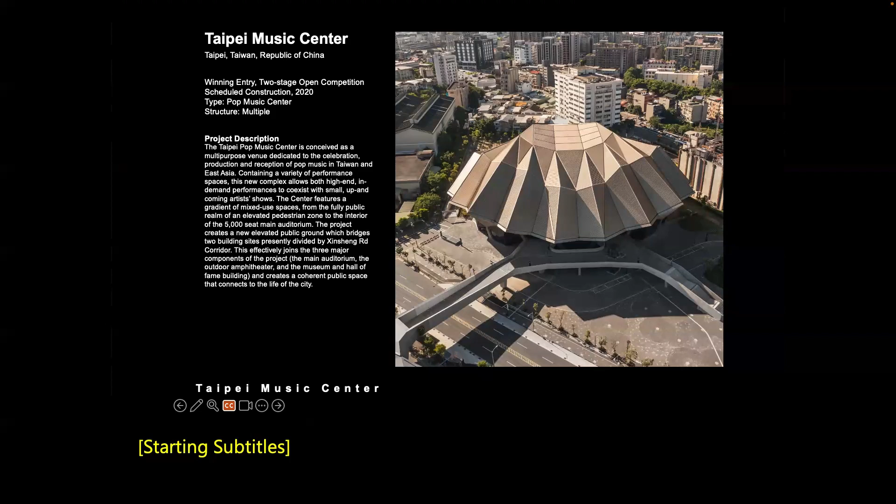So I'm going to be talking about 3 projects that we were involved in Taiwan. Two of them were built, one of them wasn't. The Taipei Music Center first, which was won in competition in 2009, 2010.

One of the things that characterized that series of competitions in Taiwan was that they always began not only with propositions for architecture, but also the kind of urban impact. There was always an urban design study that would accompany the specific architectural proposal.

In this case, it related to creating a new precinct in Taipei that would be dedicated both to the production and performance of music, popular music but also other forms, and that would bring together the distributed producers of music, especially in Taipei, into this new area called Nangang.

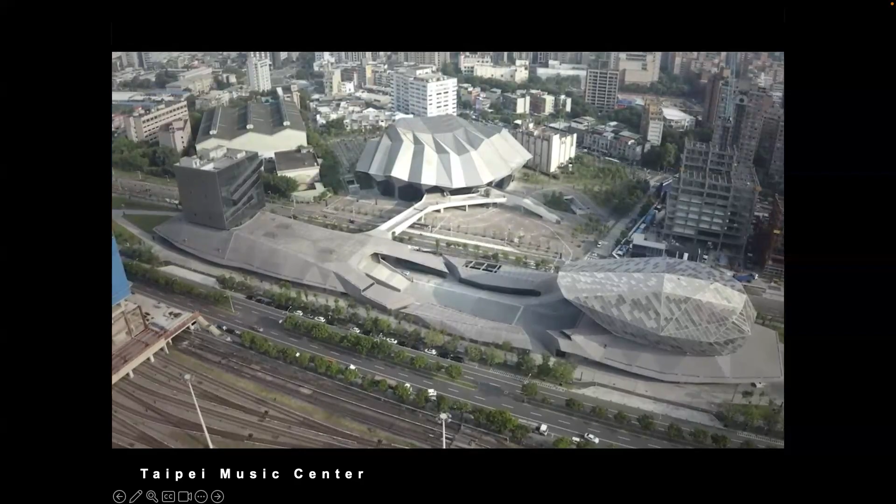One of the things I could say is this was the competition scheme, which was really radically different from what we finally built. The reason being both forces from the city, but also because the original theater and complex was created by the Ministry of Culture in Taiwan, and then it went over to the music industry, more or less, who had a completely different agenda about the scale and type of performances they wanted.

So the main hall was a 3,000-seat theater at first. Then when it went to the industry, it went to over 5,000 seats. So we had to basically start over after about a year and a half.

We had a robot theater when they estimated—this thing moved on rails along the length of the site, so it could be adjusted to the scale of the crowds they expected, and open park space would follow in its wake. I think the DSR project in a way follows a similar logic to the ambitions of that.

But when we started to get estimates on the cost of this movable stage, which was also a kind of origami structure that expanded and collapsed, it ended up having a budget higher than the entire project. So that was also an issue.

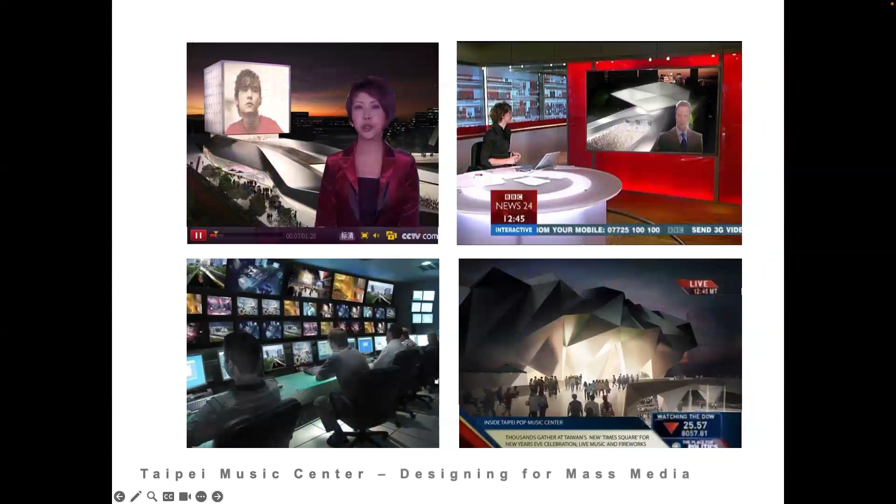The project came at a point just before the advent of social media. There was something very much in terms of the call for an iconic building or complex, like many competitions, that would be recognizable through other media—that you'd be able to see that this production is happening in Taiwan and Taipei by the Taiwanese music industry, because they felt, and I think the government also felt, that Taiwan was under pressure.

They were among the first to produce kind of pop music after Japan, and the upsurge in K-pop and in mainland China meant that they wanted to give a strong identity to their industry and their artists.

So this was a complex not so much meant for giant traveling acts, like U2 would probably go to a stadium. This is more at the scale, say, of Radio City Music Hall, and then smaller venues and clubs as well that would be associated with this.

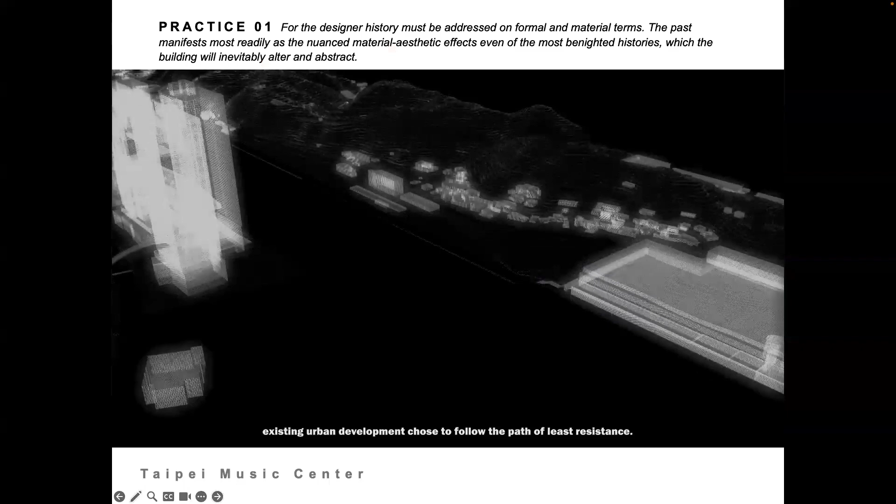We did some initial renderings as if it was shown on various TV and media, but then it just exploded with social media—the Music Center has a really active organ for promoting itself. But anyway, the thought here, given the situation of the site, was that we created a kind of artificial ground for the lower fabric of the buildings.

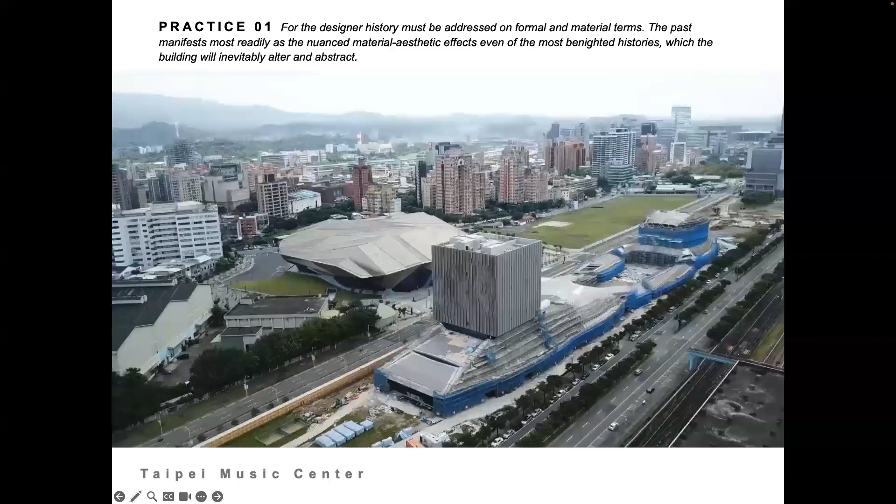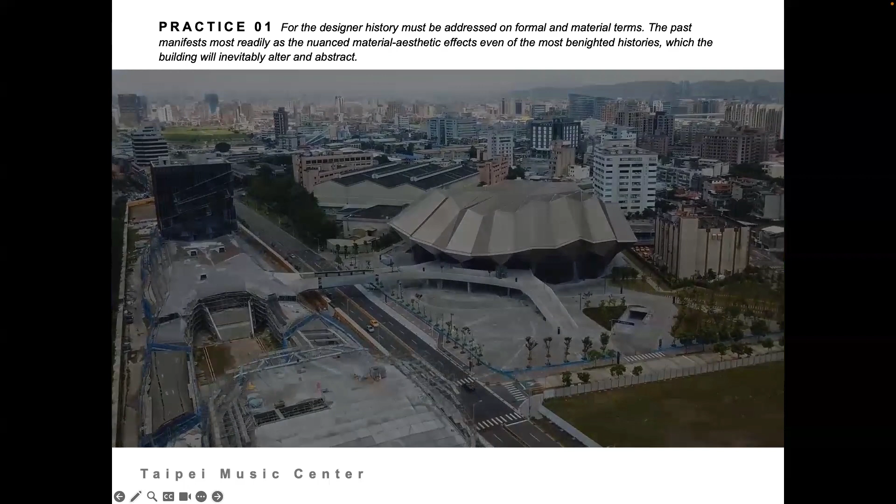And those would contain smaller shops and clubs and venues. And then we had three major object buildings that sit on top of that artificial ground. And actually the main theater, the main hall, is divided between a kind of groundwork for back of house functions, and then the object, which is more front of house for the theater.

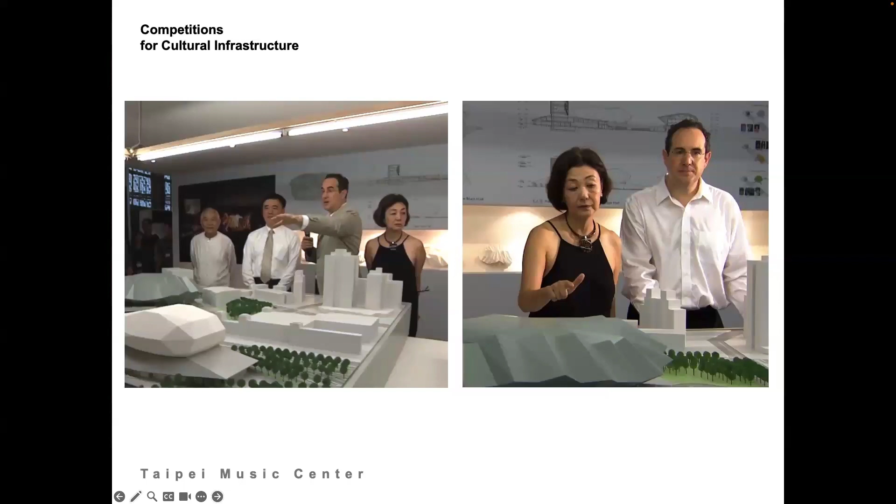But anyway, we were going through a lot of public presentations all along the course of the project. So it required a lot of very useful interaction between Ministry of Culture and then planning and community groups as the project developed.

There's also something more, I guess in general, I could say about the two Taiwan projects and the persistence of certain morphological interests, let's say.

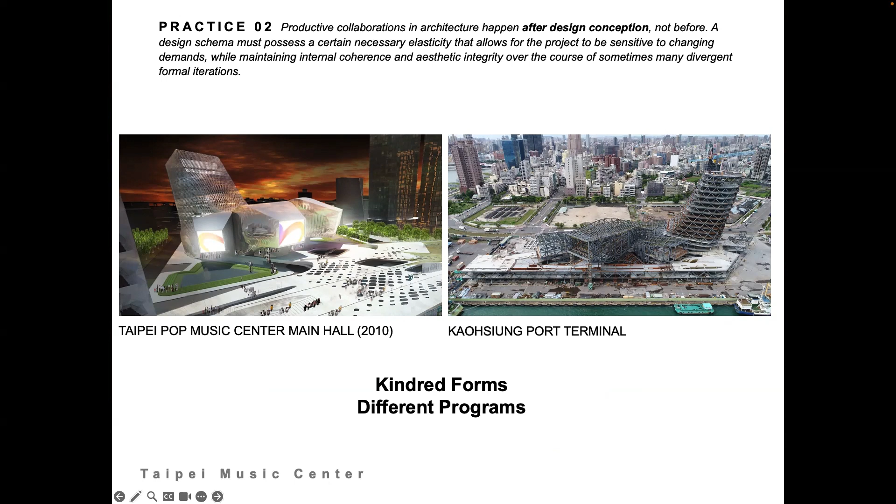We proposed a trilobe theater in the first stage of the Music Center. And then when that was not going to happen, we started to rethink the possibility of using that morphology more or less directly in the Kaohsiung project, which I'm going to show later.

And the argument we make comes both from a kind of acoustical argument for a trilobe theater, which derives from the Rusakov Workers' Club in Moscow, where you have three shoebox halls fused together. But also, because theaters are both audio and optical organisms—

we're in a theater, and that's what this diagram is trying to demonstrate. You're always focusing in on a kind of prime spot in the stage.

We realized we could basically reverse the arrows in the port terminal. That would become a kind of convergence point and a point of entry, so you would be able to see the major directions towards ships. So this manifold-like form could operate both as an optical device, but also as a kind of volume for movement.

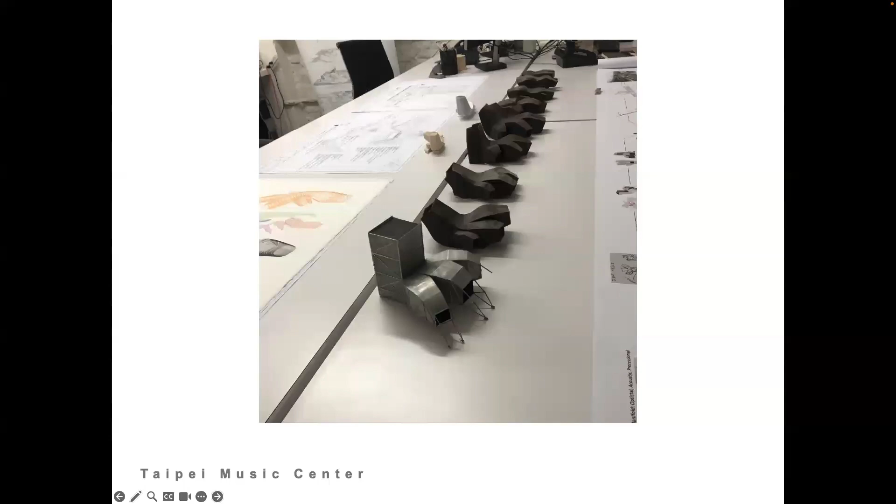So we've been basically working on these kinds of problems with the trilobe since the Cardiff Bay Opera House competition, which I believe Zaha won but never built, in the early 90s. This has been kind of an abiding interest.

And here, just some of the precedents from Rusakov and Cardiff to the Taipei early scheme, and then the Kaohsiung project, where we kind of bent the whole trilobe towards the water's edge.

And there was actually a kind of funny story. In truth, we didn't even really start with Rusakov. There was a funny technical book called Buildings for Music, and there was a Texas firm that basically used that model of the trilobe. And only later did I see the more venerable precedent—it was more this funny technical precedent from a Pomo building.

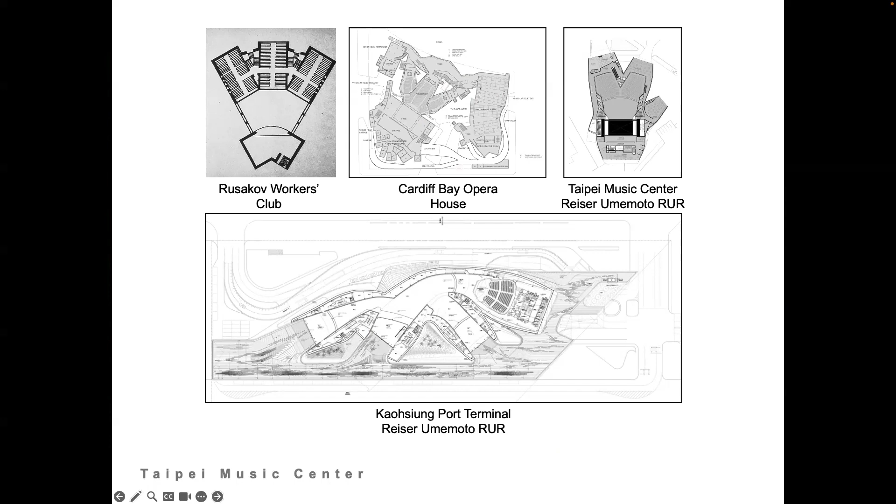He understood design practice of a certain kind in America, and he really, in many ways, shepherded the project through years of planning and the kind of realpolitik that happens in keeping the projects alive.

And yeah, others from the Ministry of Culture and the Music Center, musicians, they're all part of it. I mean, the one thing I'd want to say pedagogically with this is that it's really important—

if you're doing a design in terms of your approach to buildings and sites from our perspective, that you actually have a strong design that you bring to a site. That doesn't mean it's fixed and immutable, but that you have something of the design independent of the site you're working with. And it's the thing that then gets negotiated, as opposed to simply thinking you could visit an empty site, do an analysis, and that it would result in a significant project.

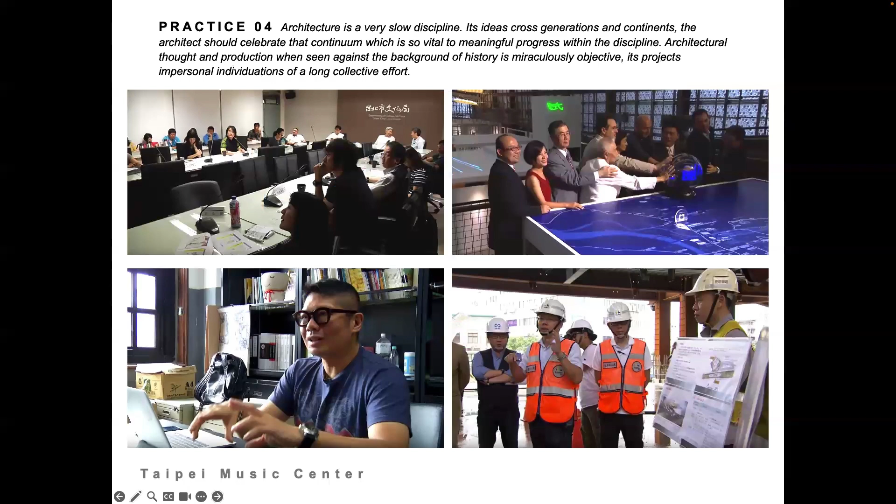This is all of the process during the 11 or so years in the design, all of those stakeholder meetings and all of that kind of development.

In terms of the scheme, I think we were one of the only teams—and Brett is aware of this—but many of the teams we were competing with were fascinated with a kind of OMA model for thinking about buildings in the city. There was a very hard constraint about noise and sound control in the project, which we somewhat ignored. Almost all the other teams enclosed the entire project, probably rightfully if guided by the acoustical rules of Taipei, into one big building. So in effect, all of the projects claimed urbanism within a building.

In a way, a kind of representation of the city within the building, which was something Rem, I think, was always interested in, or kind of an extension of that. But then there was a practical problem of really making public space.

One of the things that was really important to us was that this project, which contains all of the programs—a 5,000 seat theater, a Hall of Fame, which is that cubic building, a very large club and 3 smaller clubs, and then retail, and then a kind of production facility—that all of those would also kind of work in the everyday life of the city.

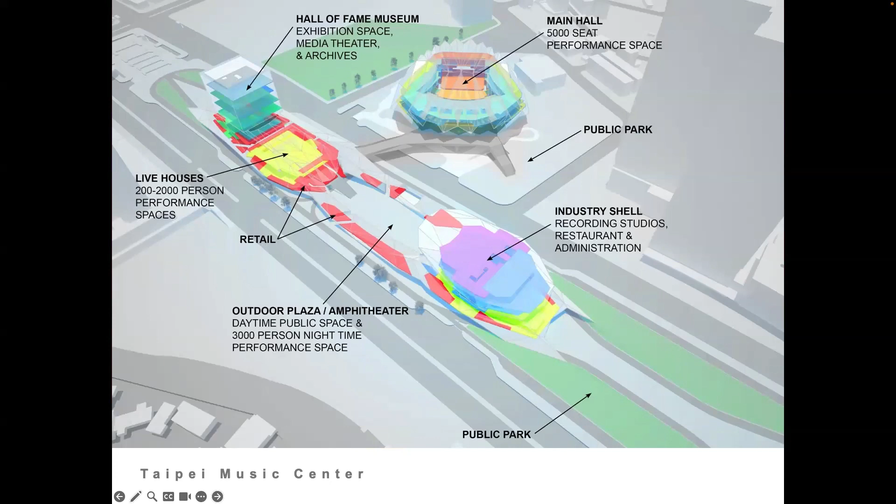The other guiding gesture, one could say, was that we wanted to have the 3 object buildings visible almost as silhouettes against the kind of lower fabric buildings, the artificial ground of fabric, with these elements clearly visible, so in a way to orient you as well.

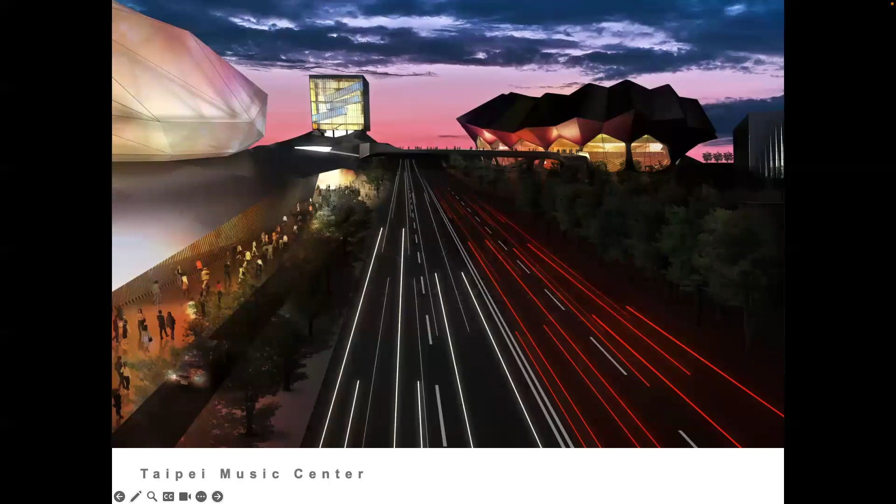So this is a kind of rendering which shows the effect we were looking for, where particularly because a lot of performance happens in the evening or night, these elements would be kind of seen as silhouettes against the sky. We were also, in a very indirect way, looking at precedents.

The stupa, a kind of ground form, and then a fascination with the overhanging eaves, even in traditional Chinese and Japanese architecture—although very deliberately trying to create a kind of near miss so you'd never overly reference those things, but kind of hold that in intention during design.

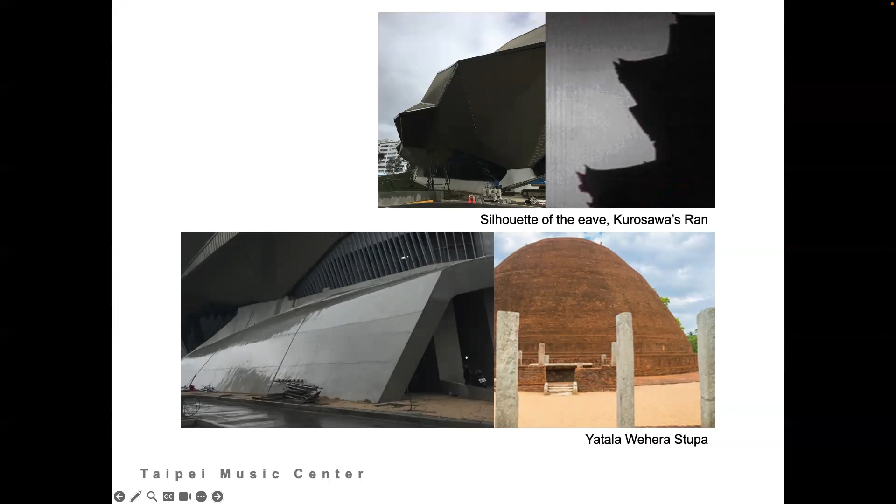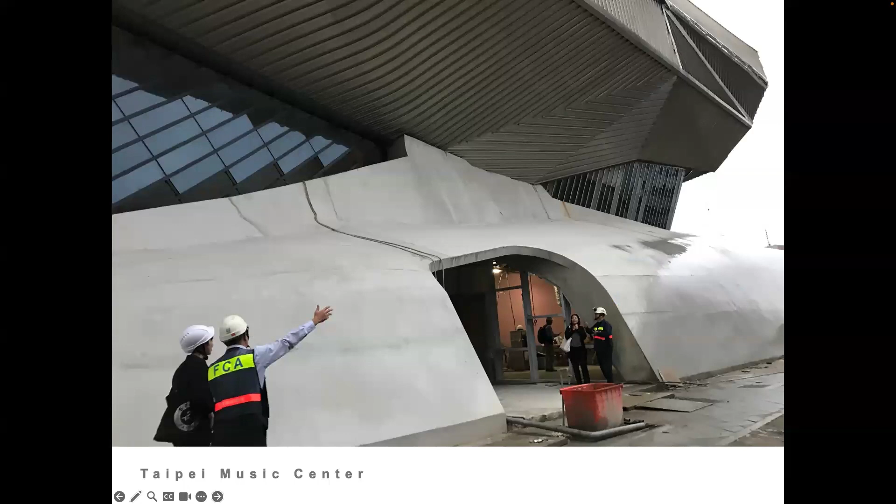And so the ground function—this is a shot of one part of the groundwork under the main hall. That's the press area, a kind of vaulted, ribbed space, which unfortunately they hung a cheap acoustical ceiling inside of, but we didn't have total control. Anyway, it's there. But it works around all of the ancillary functions—loading the theater, the technical functions, the press areas—while keeping more of the public spaces in the object building.

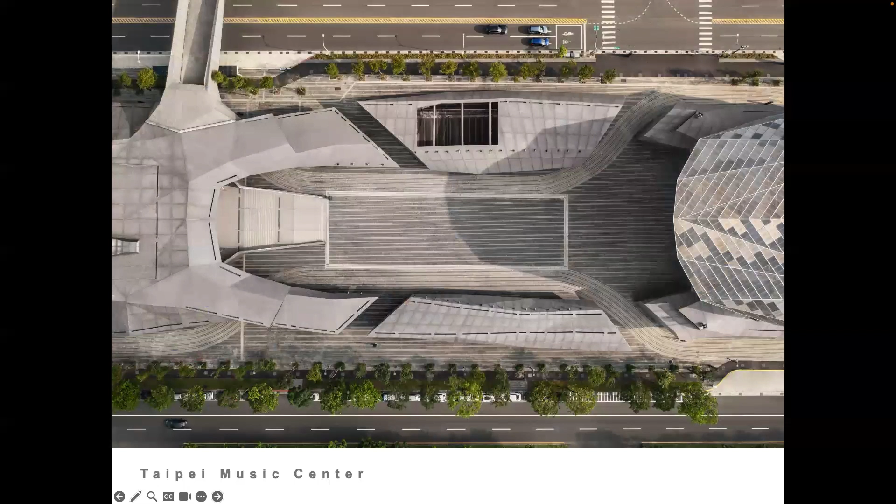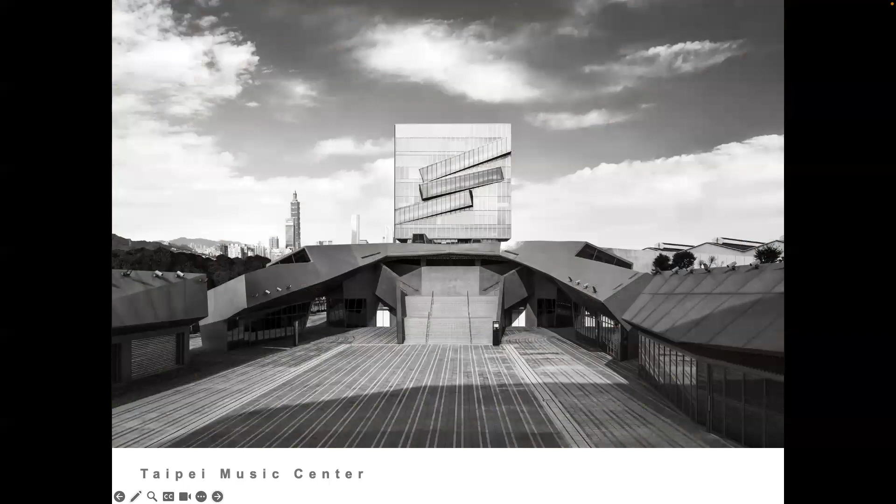And then this is a plan of that outdoor performance space that can hold about 1,500 people. This one is interested in symmetry, and perhaps shows more of an architect's view, without people.

But it actually does function independent of those outdoor concerts—there are demonstrations there. It's not overly regulated. I think it's doing its job, for what I can see.

And this is the same thing with a concert. It's also being appropriated for advertising and fashion. And here's an influencer using the site to promote herself.

It's kind of fascinating for the architect to witness this. It's even on a postage stamp as of last week. These are things out of the architect's control, but used for kind of strange references to Duchamp, as well as for Audi ads.

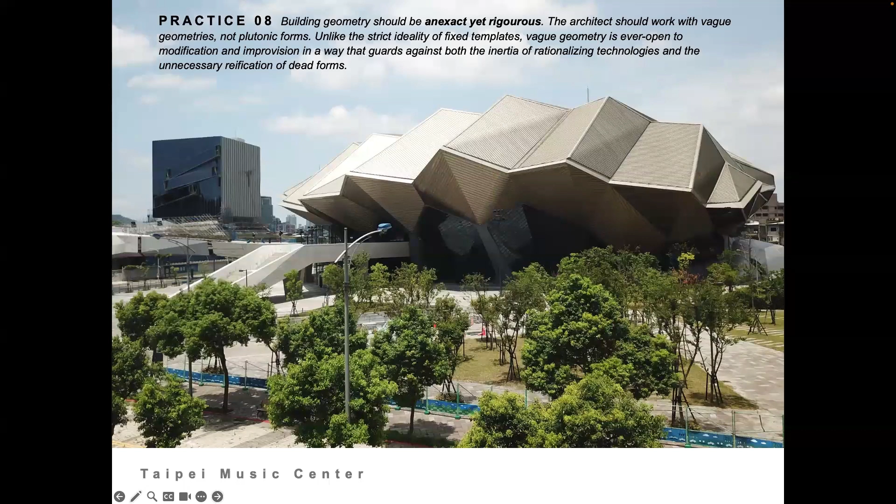To draw from really varied sources, because I'm an airplane fanatic and I'm interested in these old types - when using materials like corrugated, I find references like the Junkers airliner really interesting because it isn't a way of representing cheap, but rather pushing something like corrugated to the extreme.

All the details here are just so great. They even apparently - this factory was right across the street from the Bauhaus. So they brought in a lot of Bauhaus students, and Hugo Junkers, the professor, was actually anti-Nazi.

Very interesting - he got pushed out of his firm, because they built all of those infamous planes like the Stuka during the war. But prior to that, there was a very close connection between the craftsmen at Bauhaus and the metalworking concern at Junkers. So that was super interesting when thinking through detailing a striated surface.

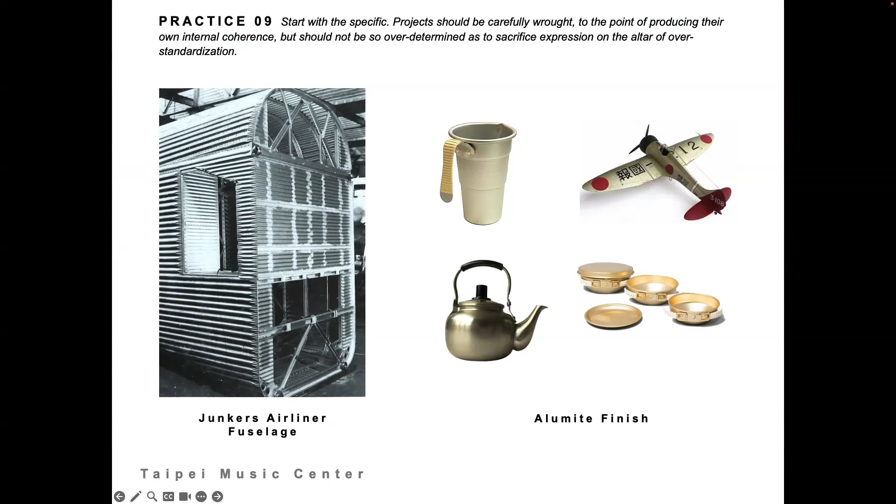The other thing was also a kind of cultural question, which was interest in these early anodizing finishes. These are really typical finishes that you see in Japan, and I think China too, called alumite. And we used that kind of golden finish on the outside of the music center, or something close to it.

Because I guess it was argued early with the airplane that it actually reflected light and atmosphere and was a kind of camouflage. We thought that was super interesting - not the silver of aluminum, but the sort of slightly gold color would be a kind of carrier for color.

That also developed over the time of the project. At first, we were looking at flip paint finishes like cars, but there were very few approved flip paints for building finishes that they wouldn't insure it. So we ultimately went to lighting as a way of applying color, as opposed to putting too much color on the building.

This is the second level of the building, with Manico in the foreground. There's a kind of bridge which connects across the street to the other site. So it's sort of a bi-level entrance.

So she's looking at that bridge, which crosses the main road and then actually goes into the theater. This is a kind of lower view from the lower level looking at that bridge. The galleries are approached from two levels - either people coming from across the street, or people getting off motorbikes or subways and entering the lower level.

This is a view of the interior of the theater. They can remove the whole row, many rows of seats actually, at the lowest level for standing crowds, depending upon the kind of use, the way they want it used.

The folded wall was kind of interesting because, in fact, while it looks like it performs acoustically, it actually doesn't. It's more of an absorptive wall because they also want to record music there. They don't want echoes - they wanted it to be almost acoustically dead. So it produces spatial effects, but it actually doesn't do what it looks like it's doing.

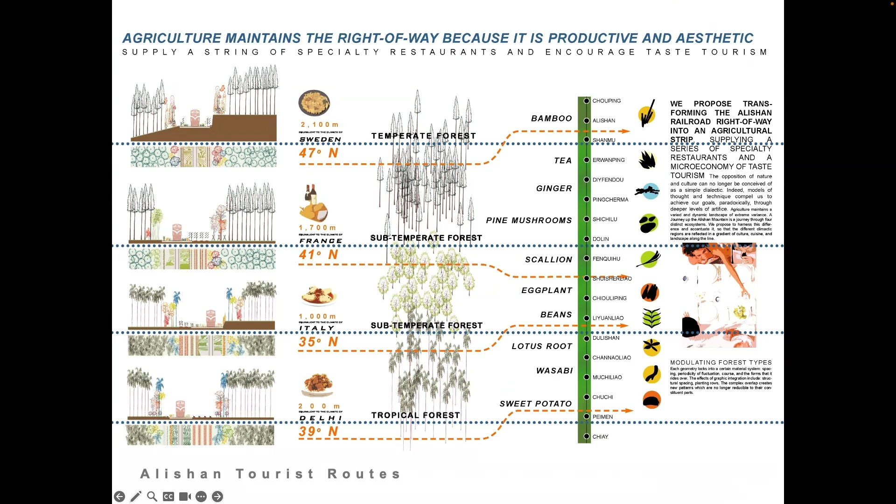We were asked to consider two major building sites for the architectural part—one at a mid-level and the other at the highest level. We developed a whole landscape and architectural proposal that would key into the various modalities: the train, but also hikers' paths, connected to one of the towns that had Aboriginal peoples in that area.

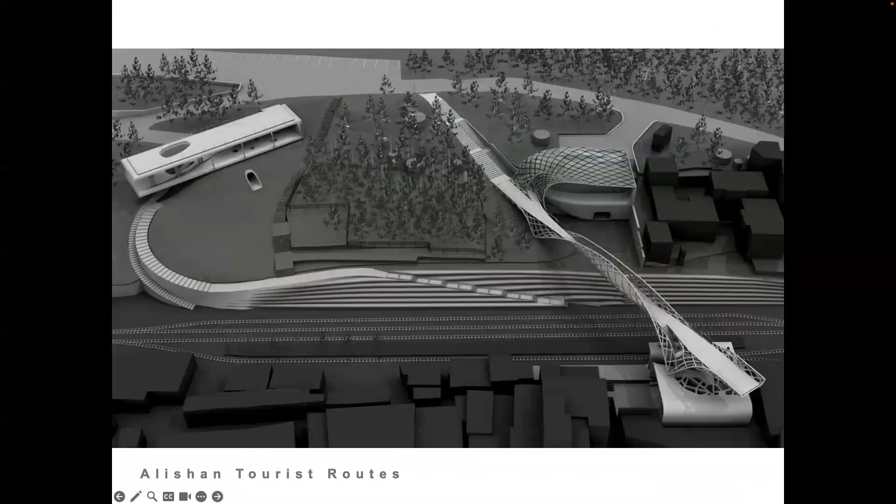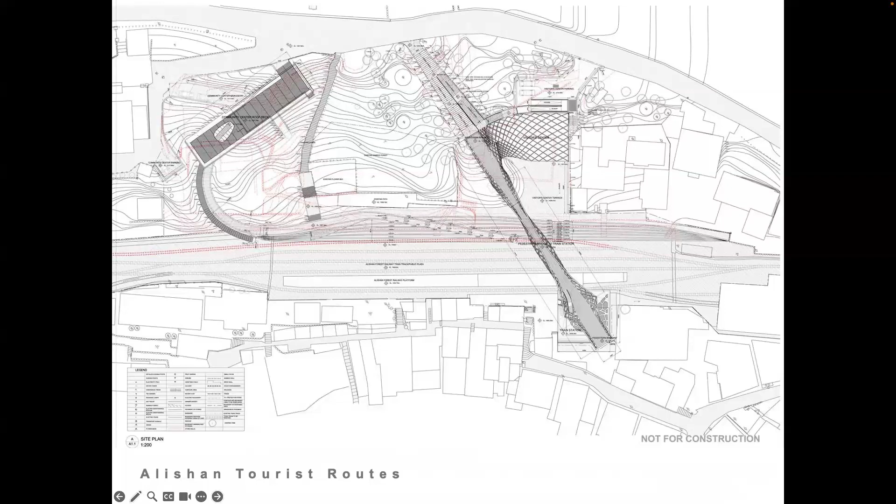I won't go too much into this, but we did a lot of work detailing this project. Unfortunately, the train company became privatized, and then there was a natural disaster with a typhoon where the whole site basically slid into the town below, so there wasn't much of a site left, and they stopped the project.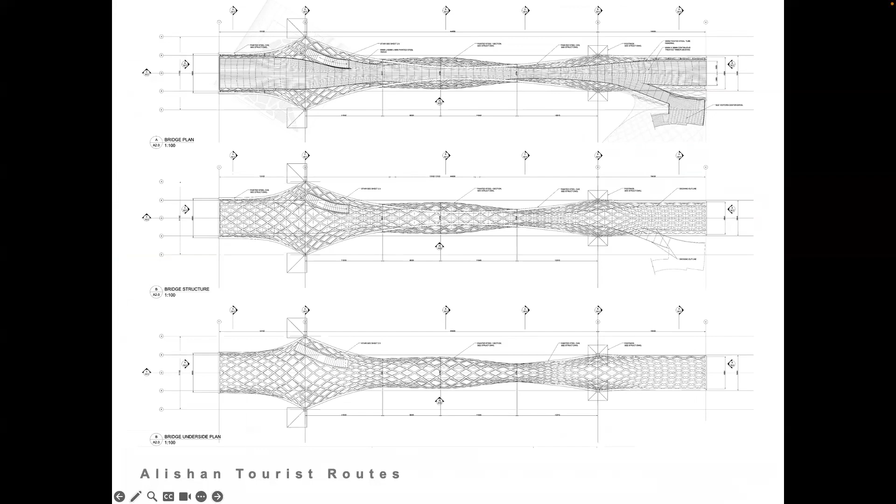But we did develop some interesting experiments with structures of grid shells that we used in later projects, and we were able to show those at the Venice Biennale in the early 2000s as a kind of prototype model. This is more a geometry model, I'd say.

It was sort of a cheat—it was very soft, made of milled wood, but then they had to put a beam, a kind of stiffener, along its belly for it to stay rigid. Later on we did a double-layered grid shell, and that was fine—it's self-stiffened, but you can still see that little spine running through the bottom. These are the kind of problems of materiality—and geometry and materiality.

All right, the final project I'll show today, also in Taiwan, in the southern city of Kaohsiung. Overall, there was a larger program within Taiwan to look at post-industrial sites and the changeover from a period of heavy industry to lighter industry and more human-based, public functions.

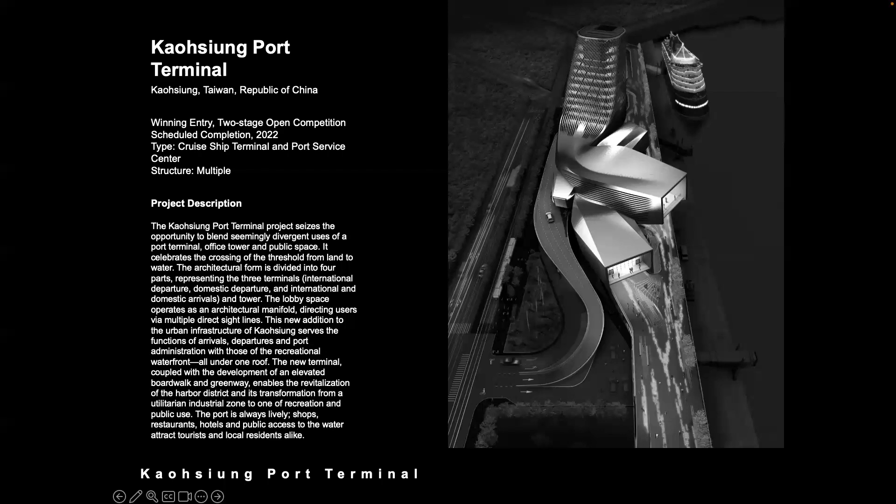The interesting thing here was that Kaohsiung is the largest container port in Taiwan—strictly not post-industrial, it's got to continue to function. So our proposal, bringing the program for a ship terminal and the Port Authority Tower to this site, was to think about how to design that building, but also how public space would be possible in a totally industrial situation where the ground would still have to be used for those purposes.

We built a Lego model for the project, but this is it in its built form—you can see a kind of base building and then the figural elements of the tower and the lobes of the port terminal.

And we had done a lot of research, design research, very early on. This was a project for the New York Edge, for the East River, that the Van Alen Institute asked us to consider, but they only wanted us to do one building, and then of course we arrogantly said we're going to do 12 miles of the edge of Manhattan. Had to be the whole, big idea.

But the thing that inspired us was that, in a sense, Manhattan is a megastructure by default. It's very artificial already. So we were looking at really successful moments of Manhattan, like the Carl Schurz Park, which is where the mayor's house is, which crosses right over the edge, the FDR Drive, and brings the public right out to the edge. And then we kind of naively thought we could simply extrude that section all the way down 12 miles and then begin to program it. The programming came from a kind of wish list that the Van Alen people provided us from local community groups. It turned out to be much more complicated than that. There's a constantly changing section of the Manhattan Edge and of levels. And so it became actually more challenging, but more interesting.

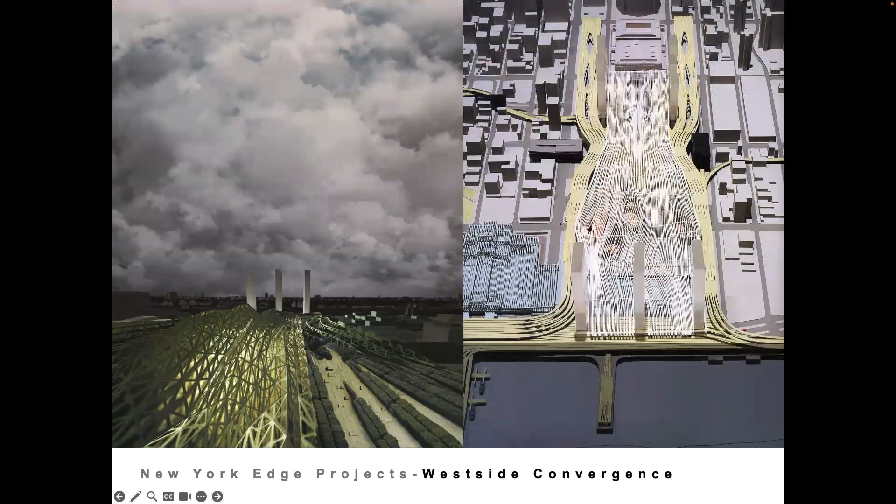But anyway, that was our investigation. So it was about this notion of a multi-layered urbanism. And then we were able to look at a similar situation and proposal for what is now the rail yard site.

So, yeah, I mean, I won't go into this too much, but just to say that we were kind of working through the idea of these edge conditions in the city.

And so when we were confronted with the situation at Kaohsiung, we immediately went to a kind of 3D urbanism model. And first, for the planning side, we proposed this elevated edge that would be public and that could conceivably keep going all around the edge of the harbor.

But yeah, very much like a lot of, I guess, Rem Koolhaas's projects, you can only design what you can design. So our project, in a way, is a segment. It's somewhat utopian in that way, but the idea is that that horizontal bar would extend farther.

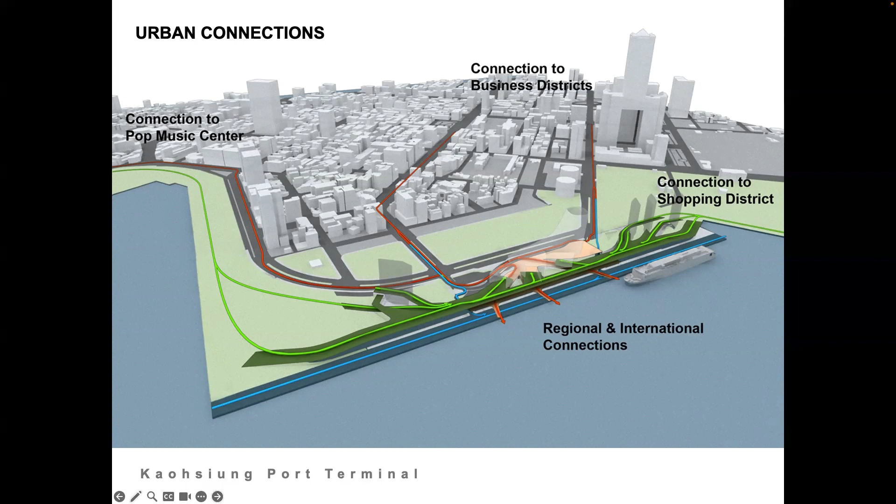The situation around the time of the competition was that there would be an expansion of tourism around East Asia, and the Taiwanese at that point expected a lot of tourists from mainland China, which may happen, or I hope they're not, they should stay tourists. But yeah, we had to design for various types of cruise ships and fast ferries.

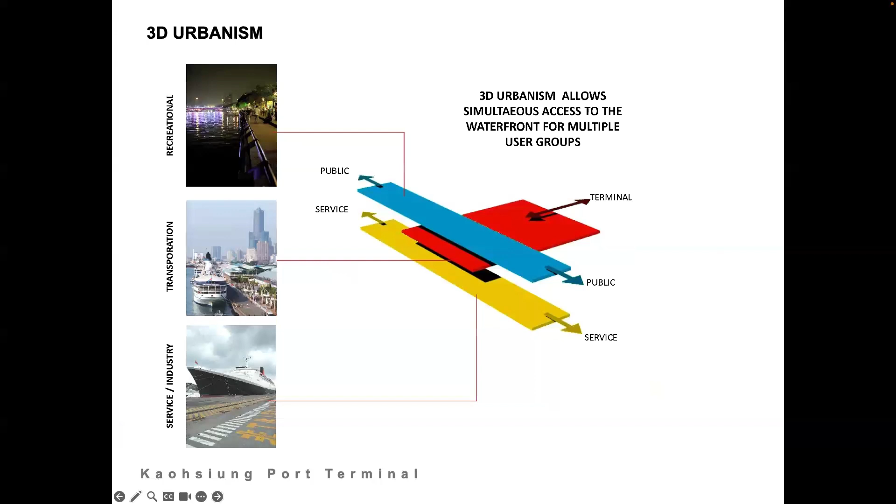And we did bring this notion of a kind of urban sandwich in general to bear, that there would be an elevated public space. The terminal would sort of slot into the mid zone, and then the ground would be given over to the industrial functions of the port and to keep that unimpeded. That's sort of reflected in the actual section as well of the thing.

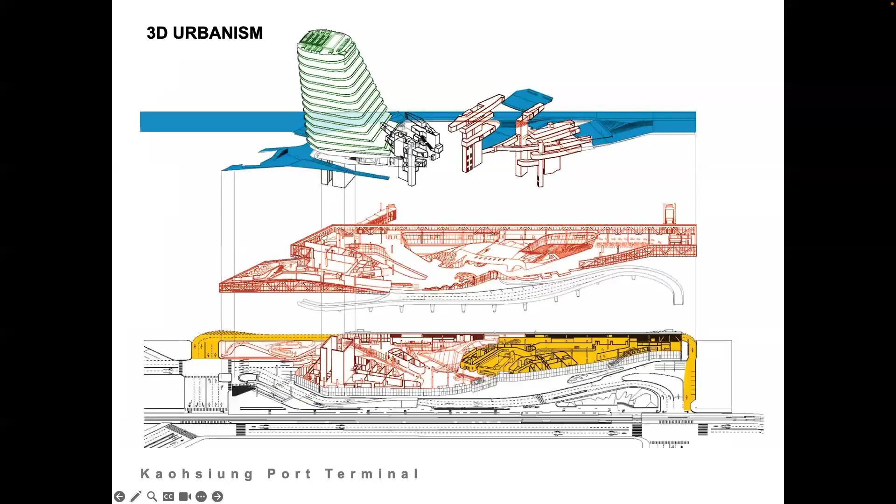So there is a kind of split between, I don't know, a kind of more or less rational, extensive model for dealing with those functional issues, and then the kind of introduction of this very figural, three-dimensional kind of architectural form, and how to kind of connect the two together.

Really, in our first phase, we did a more romantic version, something that you would probably find in Manhattan, where people would go from docks up to ships on gangways. And then we went to our logistics and they say, no, it's more or less like an airport. So that section is essentially an airport section. And it's the kind of rational machine.

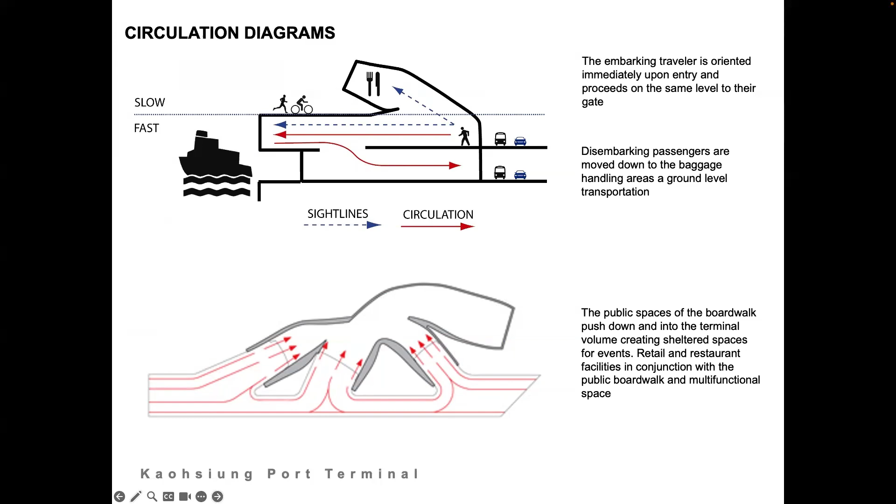And then one could say that it was sort of a mind-body split that would work. They would be fairly functional at the level of all of those uses in the horizontal area. And then the more fantastic spatial exploration happened in the volumes of the space, that you would be moved along in a rational way, but then the space itself was handling headspace, one could say.

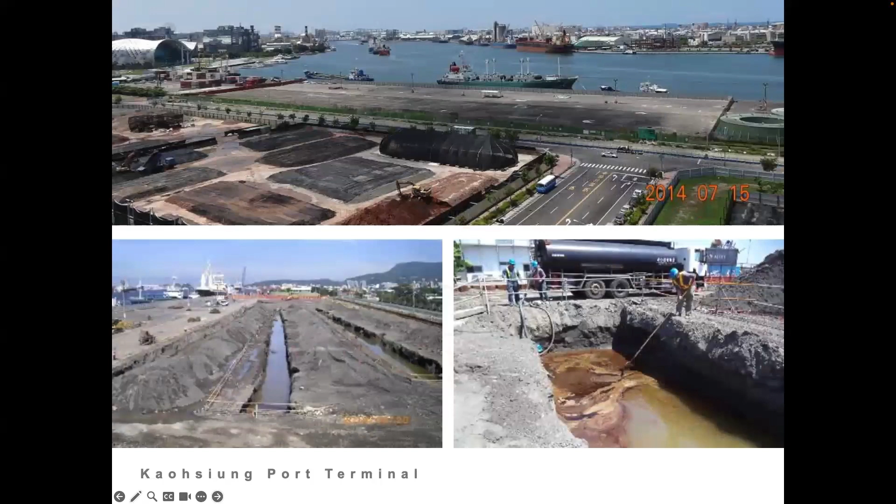We found out the site, the project began and then very quickly stopped because they found oil under the site. This was the big port for the Imperial Japanese Navy, so the Mitsubishi tank farm was there in the 30s. It serviced the Yamato and all of the great capital ships of the Imperial Japanese Navy, and of course that became a target.

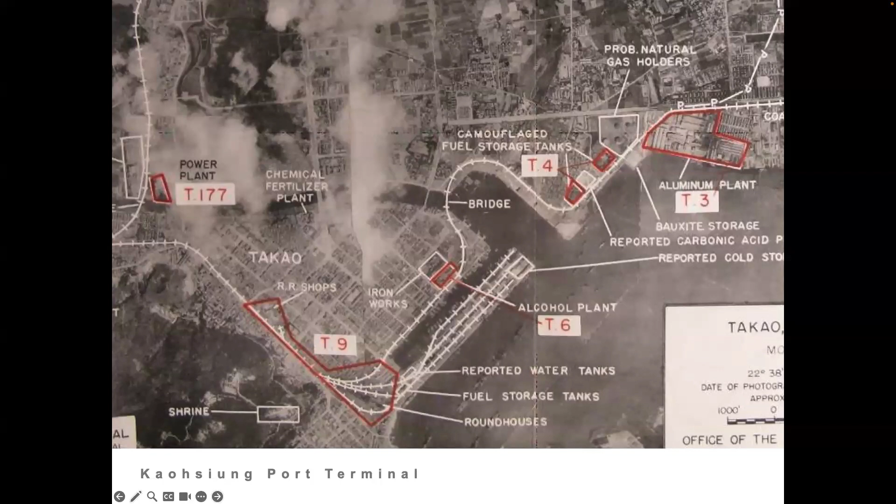I was able to find the targeting map in the National Archives. T4 is our site, and it was bombed in October of 1944. All of that oil, if it didn't burn, leached into the ground and was sitting there up until 2014, and had to be pumped out. There was also China Petroleum rebuilt tanks after it spilled more oil. So it's a historical soup that had to undergo remediation of soil before the building actually started.

The structure was designed by our former professor of structures at the Cooper Union, Ysrael Seinuk, who, how do I say this, was actually Trump's engineer. He did Trump Tower and all, but he also has a history of designing modernist buildings in Cuba. He passed away during the competition, but he was sort of a Rat Pack character. I think Trump actually paid him, but he was brilliant, and he always gave his money back to Cooper.

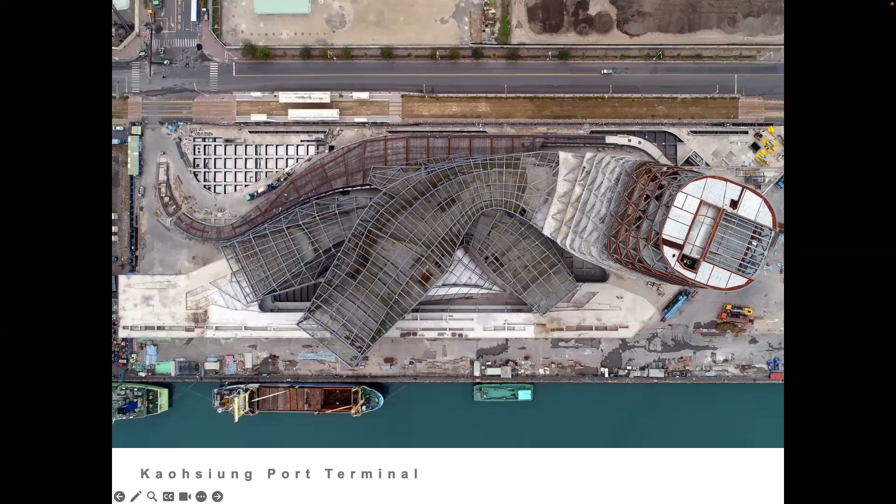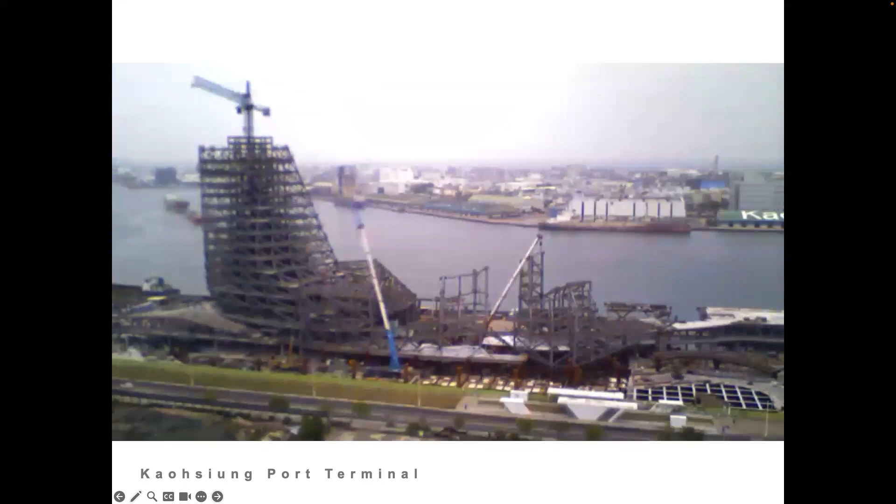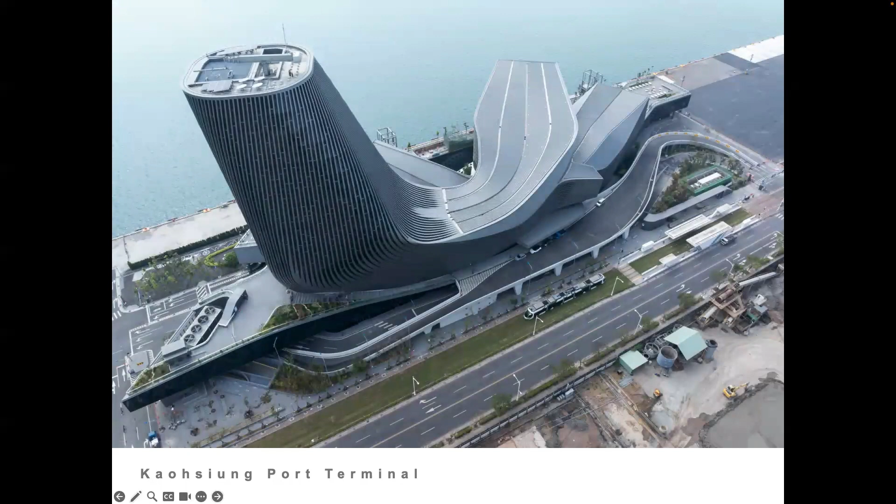Here's a quick animation of the construction of the lobes of the tower. There was a kind of diagrid structure, connecting to and balancing these large girdered structures, and then a skin that more or less covers and in a way blocks clear readings of all the levels of the project, to work against the scale of the building in an interesting way.

Iwan Baan saw the project and photographed it on his own, went into the city, so we were very fortunate - we got such a talented photographer. He was there, had extra time, and then went down. So these are his photographs.

There's also, very interestingly, we were very cognizant of the problems at Yokohama Port Terminal, where there weren't very many programs when ships weren't in port. So even from the very beginning, we were trying as best we can to program uses for the building with the city.

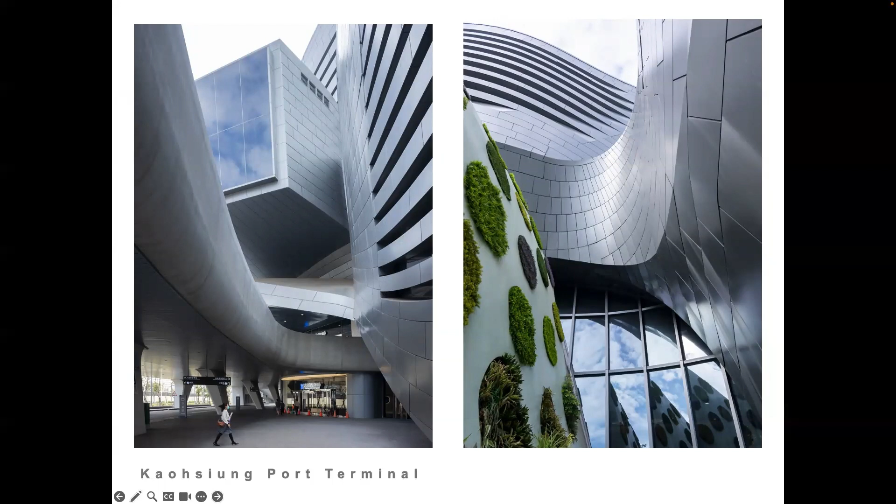These are Iwan Baan's shots of the walking around, and he found the most erotic view of it - he called it the crotch. Architectural porn.

And here's the film - oh, these are more of his shots. From the boardwalk and also from the sunken interior gardens that we were working through.

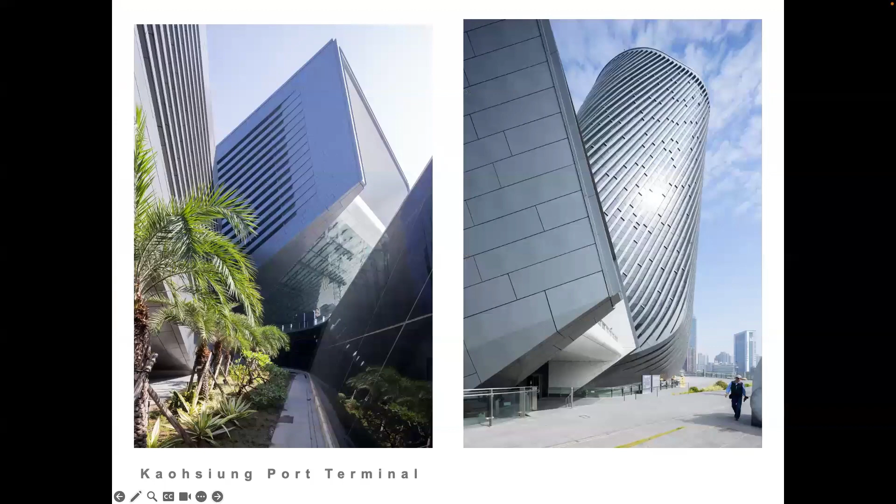I guess that's the other thing I would say in general - there was a really interesting interaction between the object building and this deck, because it doesn't land as typical on one surface. It actually almost breaks through the layers, so there are multiple points of rest for the building. Some of it, like the tower, appears to sit on the public surface, but the others descend through the section. So when you're in the lobby, you see where the bottom rests there - it's sort of settling into the section.